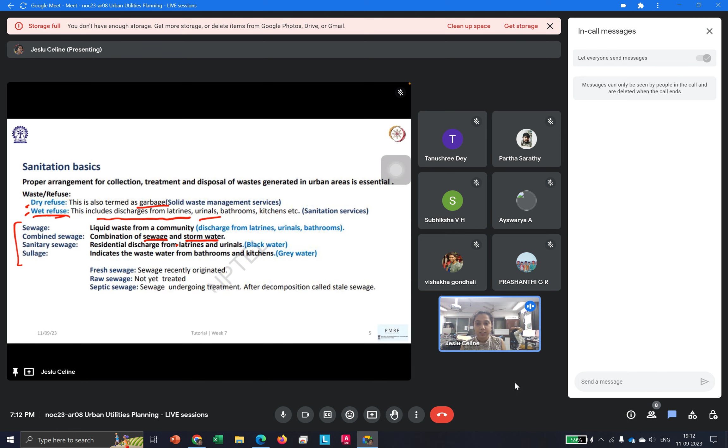Hello, anybody? What is stormwater? Stormwater is from the rainwater discharge runoff. Yes, correct. Stormwater is rainwater discharge or runoff that we carry underground. So you use pipes in order to carry the stormwater. And combined sewage means you'll just have one pipe or one path by which it's carried. So it's a combination of sewage and stormwater going through the pipe; it's called combined sewage.

And then you have sanitary sewage, as rightly said, residential discharge from latrines and urinals. This is also known as black water. So in wastewater treatment,

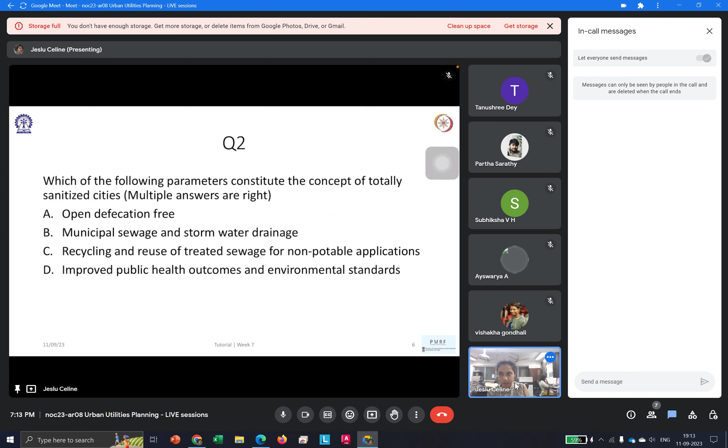we usually separate black water and... sorry, I went to the next question. Let me go back. Yeah. Okay, I think there's some trouble today.

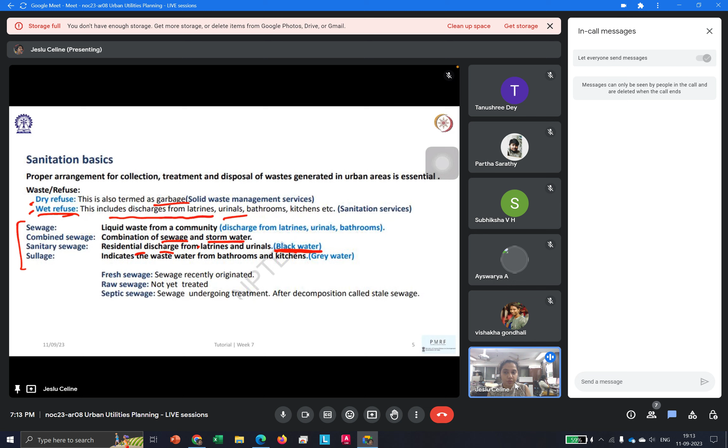Yeah, correct. So we usually separate black water and gray water. The treatment processes used for black water and gray water are different. All this residential discharge from only latrines and urinals is black water, and when you have bathrooms and kitchens, it's gray water, which means the treatment we need to undertake for bathrooms and kitchens is lesser than for latrines and urinals, right? So that's why this is gray water.

Then this is what we discussed. Fresh sewage is that which is recently originated. Then you have raw sewage, which means it's not been treated. And then we had septic sewage, which means something undergoing treatment. And after it has undergone decomposition, it becomes stale sewage. So all these are terms which we normally use. Fine. Any doubts in this question? Shall we go to the next question? Yes, ma'am. Okay, thank you.

So question 2. Which of the following parameters constitute the concept of totally sanitized cities? There can be multiple right answers. Option A, open defecation free. B, municipal sewage and stormwater drainage. C, recycling and reuse of treated sewage for non-potable applications. D, improved public health outcomes and environmental standards. Okay, so let's go option by option.

Is open defecation free part of a totally sanitized city? True. Yes, open defecation free is true. What do we mean by open defecation free again? We learned about ODF protocols, that is open defecation free protocol. So there's ODF, ODF plus, then plus plus. All this mainly talks about keeping our surroundings clean. That is, people should not be seen defecating publicly or outside on the streets.

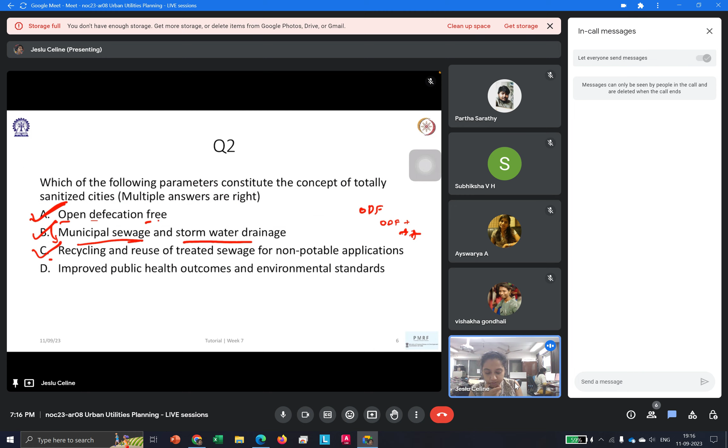Yeah, it's also true, yes. So this is important because this also comes under treated sewage. Totally sanitized cities are kind of ideal, right? So you need to treat your sewage also for this.

How much of this has been put into practice, or which cities fall into totally sanitized cities? That's a next level of evaluation. But conceptually, totally sanitized cities will need to have provision for recycling and reuse of sewage for non-potable applications. By non-potable applications, we mean irrigation, industries, or any other non-potable use. Last class we discussed potable water, wholesome water, and palatable water.

Wholesome water is free from any harmful or disease-causing bacteria, so non-potable water can be wholesome water. If it is palatable, it will have the required odor and taste also, which makes it good for drinking. And potable water is what we usually use for drinking, which is a combination of both wholesome and palatable water. So here by non-potable water we mainly mean wholesome water applications.

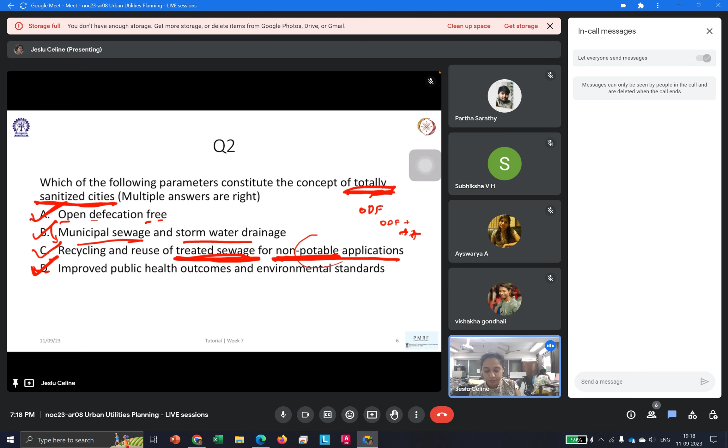And option D, improve public health outcomes and environmental standards. Yes, ma'am, that's also part of it. The importance of improved public health outcomes we have already discussed in the lecture, so I'm not going into details. Totally sanitized cities will have all four components, and many others. So all four options are needed. Okay, very good, let's go.

So this is what we discussed in our lecture. It should be open defecation free, and there should be no manual scavenging. In the first lecture we saw that in early times we had conservancy systems where human excreta used to be carried manually, or stored and then transported to a location. Later we realized the health hazards associated with these, so now we have drainage facilities.

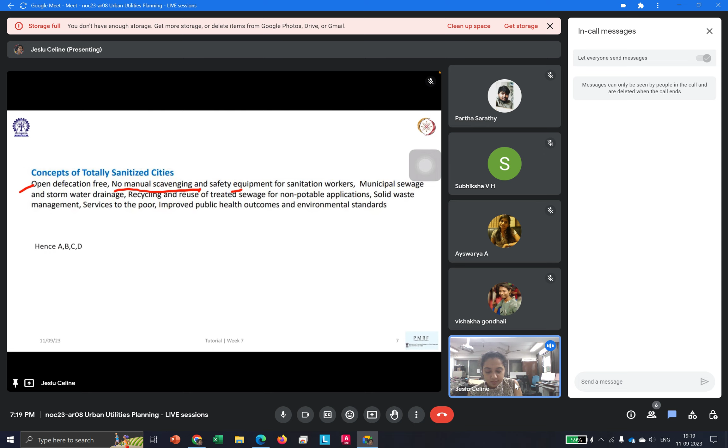So totally sanitized cities will have no manual scavenging. And all sanitation workers will have safety equipment so that they do not catch diseases easily. If they're going into drains or underground channels, they need proper safety equipment to protect them from any hazards inside.

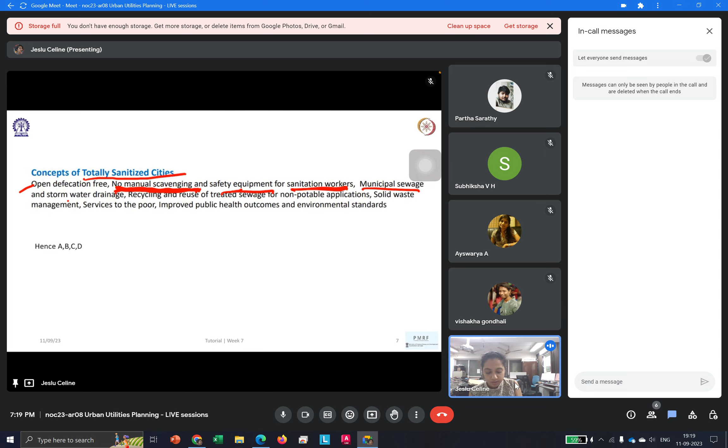Then the other factors: municipal sewage and stormwater drainage was one of the options. Recycling and reuse of treated sewage was in the options. Solid waste management is also part of totally sanitized cities. Services to poor and improved public health outcomes we already saw. So all these should be met, and the answer is all four options are correct. Any doubts? Can we proceed to the next question?

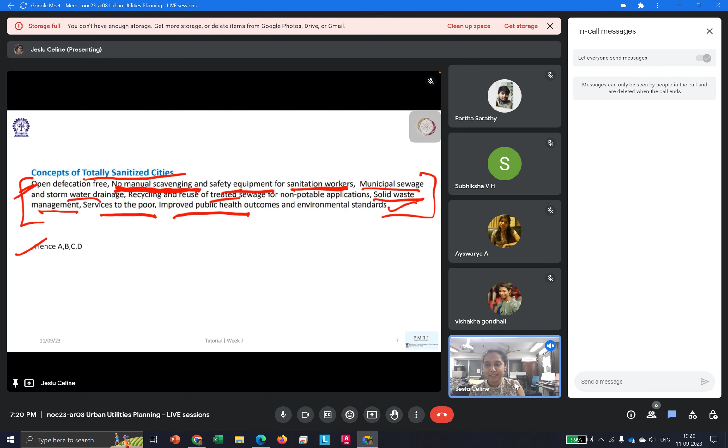Yes, thank you. This interaction helps, so I can be sure we can proceed. Question three, match the following acts with their function. We have four acts and different functions, so let's go act by act. The first one is the Water (Prevention and Control of Pollution) Act of 1974 and its amendments. Which do you think it matches best? Anybody can attempt.

Prevent and control water pollution and ensure the wholesomeness of water, ma'am. Is it right? Okay, so you feel this might be the correct answer, prevent and control water pollution, but you're not sure of the second part, ensure wholesomeness of water. Oh, sorry, I think I just went to the answer. Okay, let it be. Anybody have a difference of opinion, any other option? No.

One easy method for match the following in your test, if you are a bit confused, is to look at the other options. If any other option is a better match, then we need to think more. Here you are partially doubting whether this part is correct, but none of the other options would match this. So it's clearly given: prevention and control of pollution.

The first one talks about quality of water. This one talks about environmental improvement. Then here it talks about taxes. So if you go option by option also, we see that there is nothing which mainly looks at prevention of water pollution. So even if you're not really sure of this, maybe we can say that this is the best option available over here. So we can mark that.

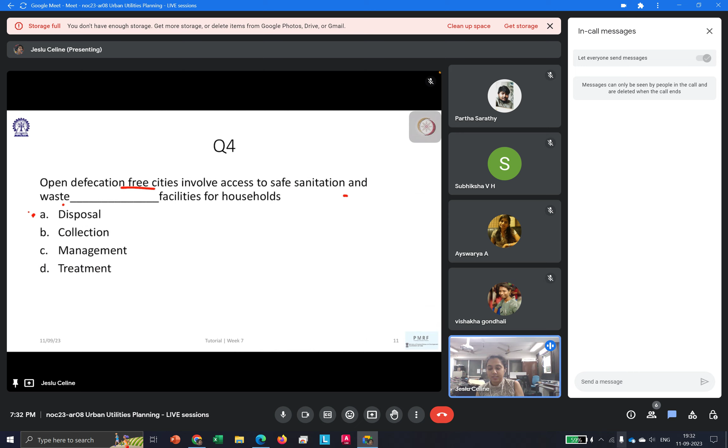Anybody else? Any other opinion on that? Difference of opinion? Or everybody says disposal? Okay, so disposal is the correct answer. Yes, for open defecation free cities, in this particular question, there should be access to safe sanitation and waste disposal facilities for households.

But the logic which Partha said is not the way by which we arrive at this answer. It's not that at the residential level, if we give a disposal facility, everything else will fall in place. It will not, because if you have a facility for disposal, but you do not manage it properly and do not treat it properly, then it creates a problem.

So, for instance, I have seen this in Kolkata. Right outside the airport there's a huge area, I don't know how much, but it's very huge. All the waste which has been collected is dumped over there. It's supposed to be incinerated, so it's dumped there waiting for its turn to be incinerated, but it's not.

So you pass through that locality, you cannot go through that road. It's right outside the airport, so anybody going to the city will have to see that at least once. I've observed this in many other cities also, not just Kolkata. In Tiruchirappalli also, a huge waste pile has been formed because of dumping. So the problem with this is that there is collection.

That's because they have a disposal facility. They are keeping it somewhere, somebody is even collecting it, which means the second step is also done. But maybe on the management side some weaknesses are happening, and on the treatment side definitely a weakness is there, or it's not being planned properly. So just by having this facility in our city, it's not necessary that all the others will fall into place.

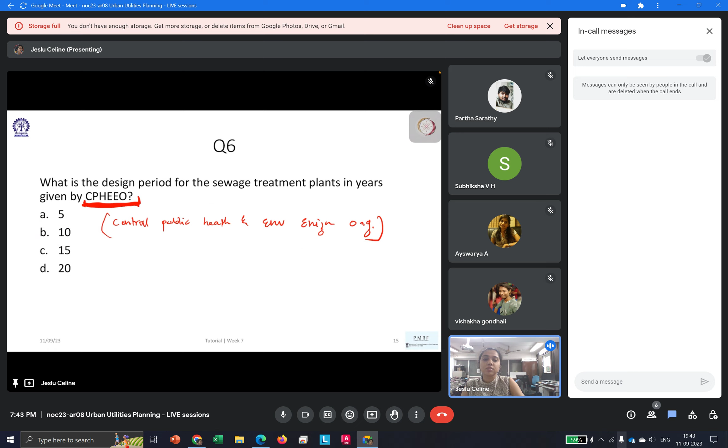So this body is responsible. It's a part of the Ministry of Urban Development. It's a small wing in the Ministry of Urban Development, and it mainly deals with all the matters related to water supply, sanitation, etc. That is why all the manuals that we are seeing regarding water supply and sanitation are CPHEEO manuals. So in our references also, you might have noticed that most of the content we have taken from the CPHEEO manual.

So now we are talking about design period. What is design period again? Let's have a quick recap. What is design period? Like how much period of time it should be worked. Yes, very good. So this we learned in our module 2, I think, where we discussed design period. It's mainly the duration for which the facility should last. At that time, we were mainly talking about water supply facility.

So here again, now we are talking about sewage facility. There we were designing reservoirs or underground tanks, or how do we take water from underground. So all those infrastructure, underground wells, aquifers, how long will they last? Then we were learning about overhead reservoirs, pumping stations, and their design periods. We were thinking, if you're building a facility, how long should that last?

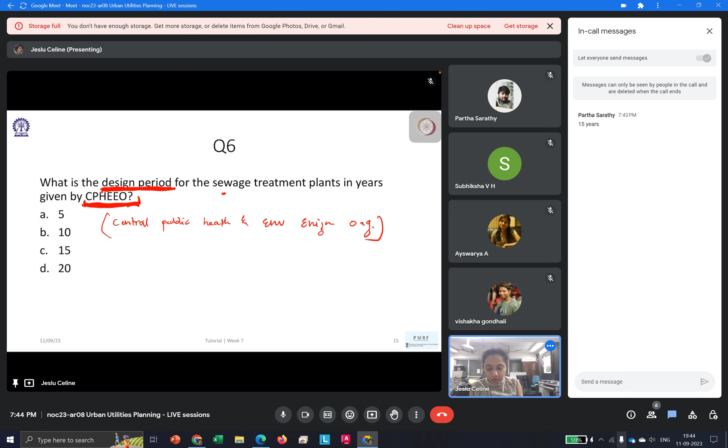So here we are mainly talking about treatment plants, the sewage treatment plant, but in the lecture we discussed other sanitation facilities also, and we saw how long the facility should be designed for. So that is design period.

And in this week 7 lecture, we learned about short term planning, medium term planning, and long term planning. Remember? Short term is approximately around 5 years; the design period is short. Then you have medium, around 15 years. These are very general numbers, just to give you a range of values. So around 5 years is short, 15 years medium, and if it's around 30 to 35 years, then you say it's long term.

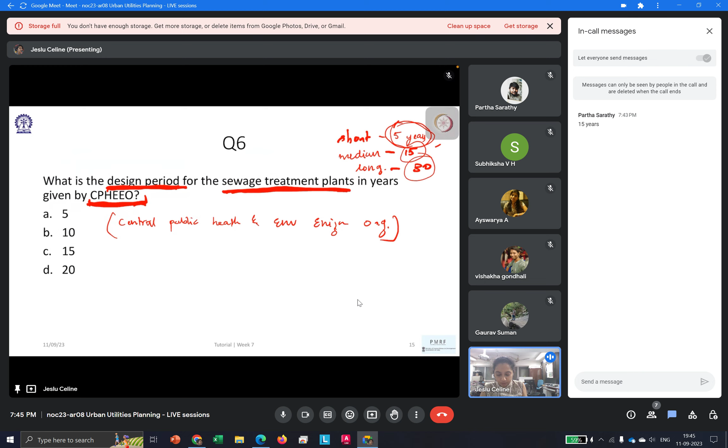So now, coming back to the question, we are talking about sewage treatment plant. Based on this, can you guess what this will be? Do we design treatment plants for short term, medium term, or long term? Medium. Medium term, so let's say 15. Yes, ma'am. Anybody else, any difference of opinion?

Okay, no. So we design it for medium term because a treatment plant is an investment. Towards the end of our lectures, in the last two lectures, we saw different types of treatment plants and the different layers which are involved. So designing it for a short term is not feasible, because if it gets worn out within 5 years you'll have to invest more again. So you need it for some more time.

And designing it for a long term might also not be good, because there are certain elements or components in it which might get worn out in a short or medium term. So you cannot keep the treatment plant; you have to keep replacing it.

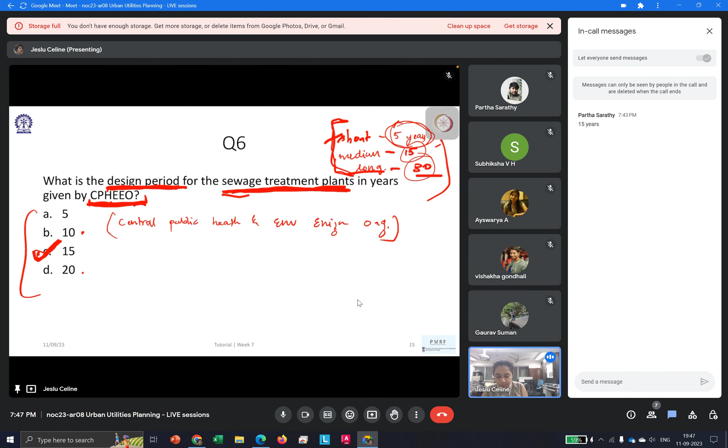So this is not something which is designed for a long term also. So a medium term is good enough. So 15 is the right answer. It could have been anywhere 10 or 20, but as per the CPHEEO manual, 15 years is what we have. So let's see some of the other things.

So we have other elements which are part of the sewage treatment or sewerage components. We have land acquisition. Land is something which needs to be a long-term investment because you cannot keep changing the land. You don't leave one land and go to another land to build another treatment plant. So land acquisition is always done for a long term.

Then sewers are also laid for a long term, but non-conventional sewers are laid for a shorter term because they might have come out of certain emergencies or certain specific requirements. That's why they're non-conventional. So you have them for a medium term. Then pumping mains, which are for long term. Pumping stations also long term.

Machinery can get worn out, so it's for a medium term. Treatment plant is for a medium term. Disposal again for a long term. And utilization can be medium term or case specific; it can vary. So these are the standards, and based on the standards we usually design. Any doubts? No? Okay, let's proceed to the next question.

Question 7. Which of the following statements is or are true concerning the city sanitation plan? Multiple answers are correct. A, it considers only long-term sewage project plans. B, it involves a determination of existing needs, demand or deficit. C, it involves the evaluation and monitoring of 100% sanitation status. D, it involves capacity building. So option A, is it correct? Does the city sanitation plan involve only long-term sewage project plans? No, ma'am. What all does it involve then?

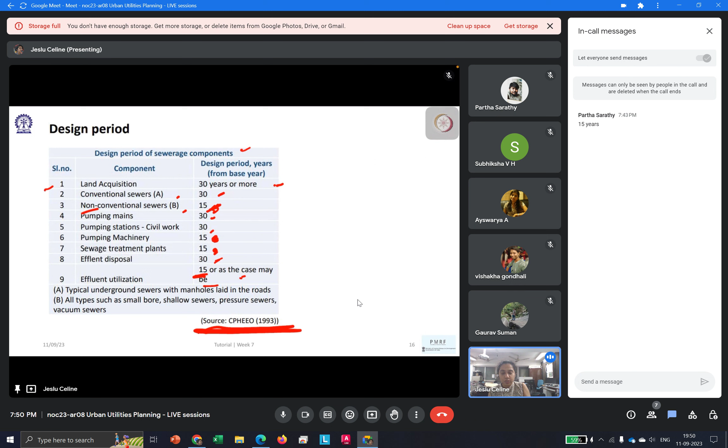So it involves both. Channeling all the network is a long-term plan, so it focuses on that also. But you also have other short-term or medium-term plans which we saw in the previous question, for instance a treatment plant, which is for a medium term, or machinery or laying of sewers. So these components of the sewerage system will also come in your city sanitation plan.

So it considers long term, short term, and medium term. This will be clear in our next slide, where we will see all the components of the city sanitation plan. So when you say only long-term plans, that is a wrong answer. Now, B, it involves a determination of existing needs, demands or deficit. Is it correct?

Yes, ma'am. Yes, it's correct. I think that is what Gaurav was also trying to say. It looks at channelizing things. You are understanding the existing needs, where the demand is, what is deficient, and how you channelize towards it. So yes, it involves that. And option C, it involves the evaluation and monitoring of 100% sanitation status.

Yes, ma'am. So this is planning for it, then you also have evaluation. That is also part of the city sanitation plan. Now, option D, does it involve capacity building? Yes, it does. Capacity building we saw in the previous one, with the different organizations. NGOs are in charge of capacity building and all that.

So this is our city sanitation plan, which we learned, from the Ministry of Urban Development report. It involves all the aspects. You have operation and maintenance. Then you also have implementation and management. It also has capacity building. Then it has the evaluation for 100% sanitation status. Then what was the other one?

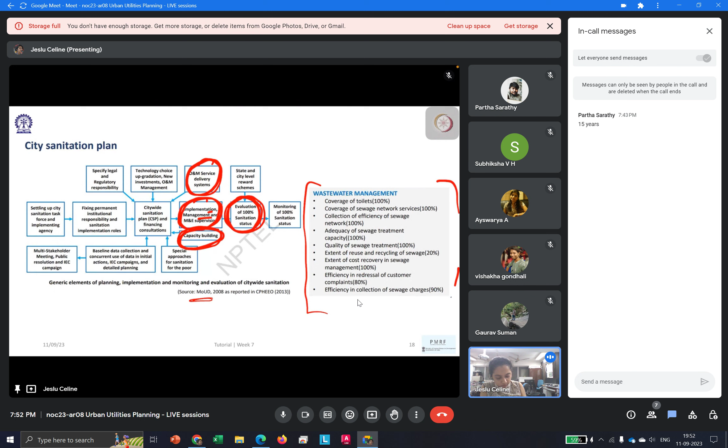Understanding the existing needs, setting up technology, baseline, special approaches, setting up a task force and implementing agency, meeting resolution, O&M. It involves understanding the existing needs, demand and deficit also. So for wastewater management, all these are also given. That is our next question. Let's come to that then. Was there any doubt in the previous question?

Okay. So let's go to the next question. Match the following wastewater management parameters with service level benchmarks. So by service level benchmarks, we are mainly talking about the percentage of facility, so for each parameter, how much percentage of that parameter needs to be there. So it's a benchmark. You say that at least this much percentage should be there. The benchmarks have been set based on that.

So let's go option by option. This is directly from the manual, so there's nothing more to discuss. So we can guess and then go. Coverage of toilets, how much percentage? Any guesses? 100%. Okay, 100. So coverage of toilets 100%. Yes, we just saw it right now.

Then extent of reuse and recycling of sewage, how much percentage? Extent of recycling of sewage, how much percentage? Ma'am, I think 20. Okay, okay. Recycling of sewage is not given much importance. Fine, let's see. Then redressal of customer complaints.

Yeah, so it's 80, ma'am. 80 percentage. Redressal of customer complaints, you say it's 80 percentage. Okay, correct. Then D, efficiency in collection, so 90 percentage. So this is what is there. So let's see. Yeah, we just saw it in the previous slide.

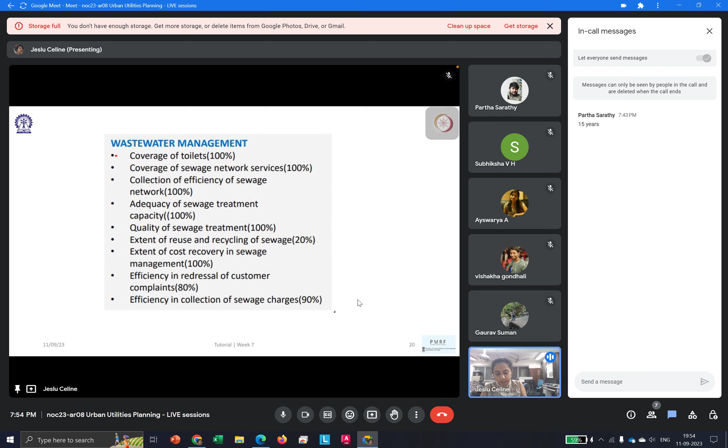So yeah, coverage of toilet 100 percentage. Then what else was there? Efficiency in redressal of customer complaint 80 percentage, efficiency in collection of sewage 90 percentage. Extent of reuse and recycling of sewage 20 percentage.

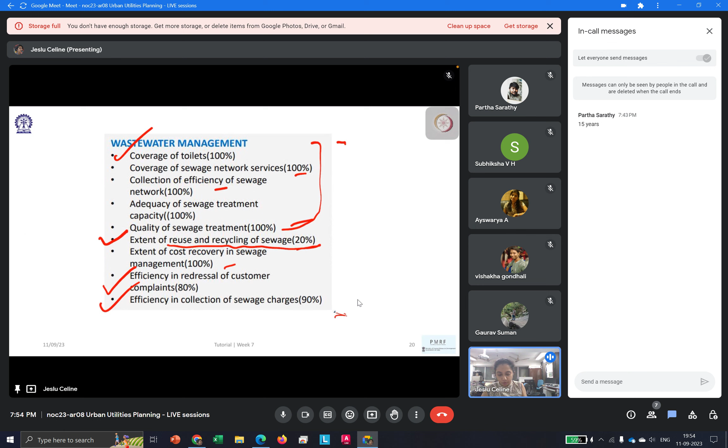So you need not memorize the whole thing, but I would say for examination point of view, some important things, especially the 100 percentage ones. There are so many 100 percentage that you can remember a bit because it might be important from your examination point of view also. So this one works out to option D. So we just discussed this. So let's go to question 9.

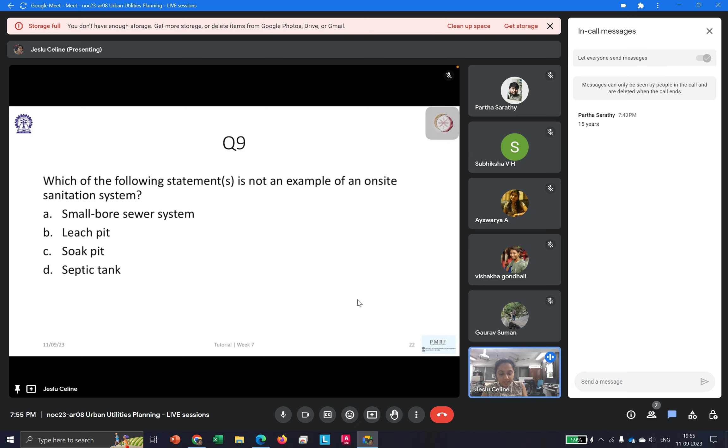Which of the following statement is not an example of an on-site sanitation system? Firstly, what are the different sanitation systems and what is an on-site sanitation system? So we learned 3 types of sanitation systems. Can somebody give a quick recap of 3 types of sanitation systems? Anybody? Partha, I think you can do that. Ma'am, leach pit, septic tank, and C and D, I guess.

Yeah, so these are all examples of sanitation systems like leach pit, soak pit, septic tank. I'm saying broadly, so here they've asked for an on-site. So I can say that one type of sanitation system is the on-site sanitation system. Apart from that, 2 other sanitation types we learned. Anybody ringing any bells? Decentralized. Very good. Yes, so you have got decentralized, and then of course, if it's decentralized, then what's the other one?

Conservancy. Conservancy, yes, we learned that also. Then you have the centralized system also. So we can say centralized system, decentralized system, and on-site system. These are the 3 which are normally in practice right now. If you look at any city, mainly these will be there. And decentralized itself can be a combination of centralized and on-site. So it means there's a decentralization which is there.

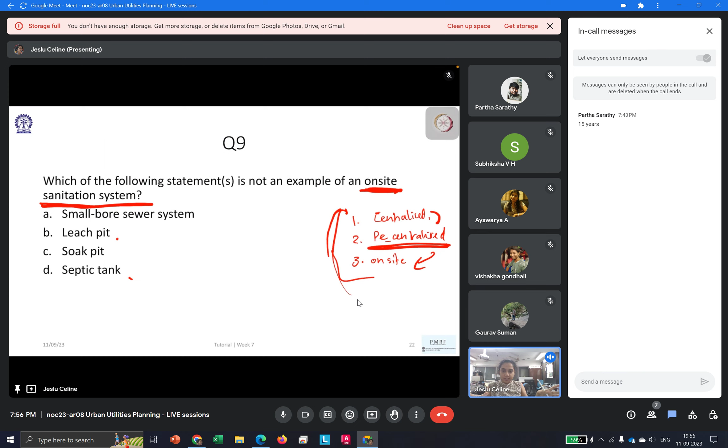Like if you have a city, then over here there is one STP or sewage treatment plant which caters to this region, then there can be a central system which caters to all the regions. And then some regions can have on-site sanitation systems also. So these are the three which we learned. So again, by definition, centralized means there's a central facility and you're carrying all the sewage to that central facility and the treatment is happening at the central facility.

Decentralized is what we discussed right now. There can be small clusters, and it can be along with a centralized facility and an on-site facility also. A mixed facility can also be called a decentralized facility. Then you have on-site, which means you're not transporting it anywhere, but on the site itself you're treating it, removing the effluent out, and then taking the sludge out. So there's some on-site treatment facility.

So we have been given four options and asked which of the following is not an on-site sanitation system. So let's see. A, small bore sewer system. Is it an on-site sanitation system?

Any guesses? You can just guess. Yes, no? Nobody, no opinion? Okay, let's start from the last option. Septic tank. Is it an on-site sanitation system? Septic tank, yes, we should be knowing septic tank because in most of our houses there's a septic tank, right? In our residences, I think yes.

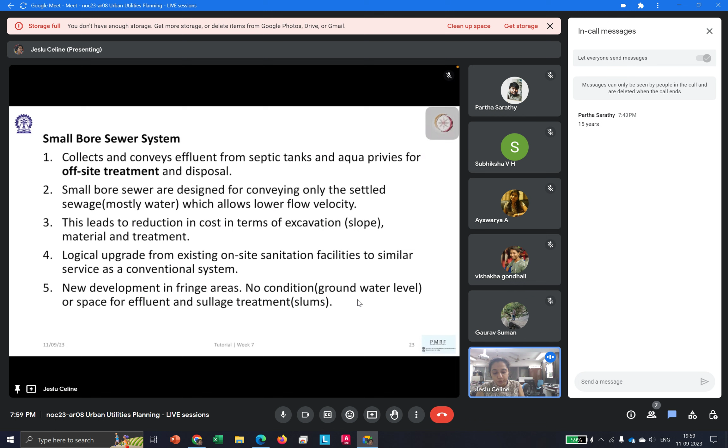Small bore system is not an on-site sanitation system. In a small bore system you collect it and then you transport it to a different location and the treatment happens there. So a small bore system collects and conveys the effluent from septic tanks and aqua privies for off-site treatment and disposal. So it's a combination. You have a septic tank which is on-site, but from this the small bore system collects it and conveys it to an off-site treatment where it is disposed of. This can also be there in most residences.

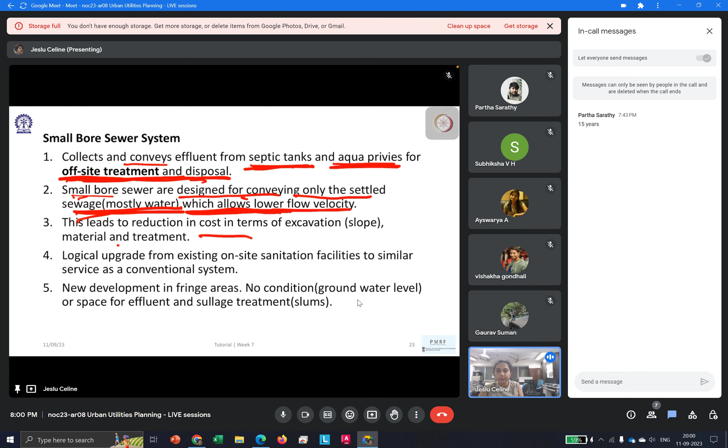It's designed for conveying only the settled sewage, which allows a lower flow velocity. You mainly take the settled sewage, which is mostly water, and transport it out. Its advantage is that it can reduce the cost in terms of excavation, slope, material, treatment. Your septic tank need not be of that much depth; its capacity can be reduced because some amount of sewage is collected and taken out for off-site treatment. So you save in cost. It's a logical upgrade from the existing on-site sanitation system.

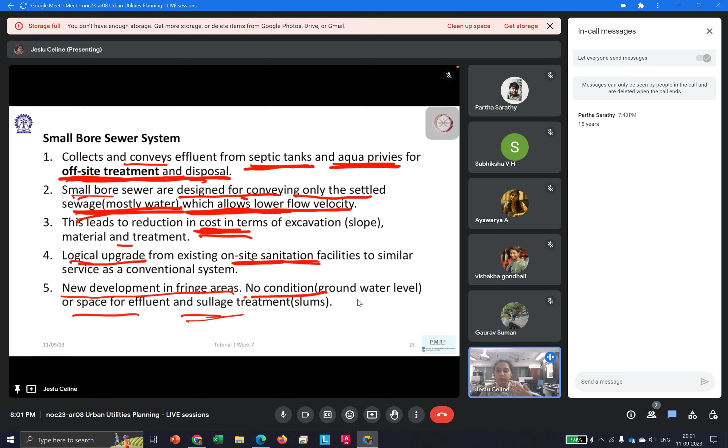One more additional benefit is that it can allow new development in fringe areas, so you're not restricting future development, or your space for sullage treatment. All this is not getting affected. So these are the advantages of small bore system.

One sec, somebody wants to join.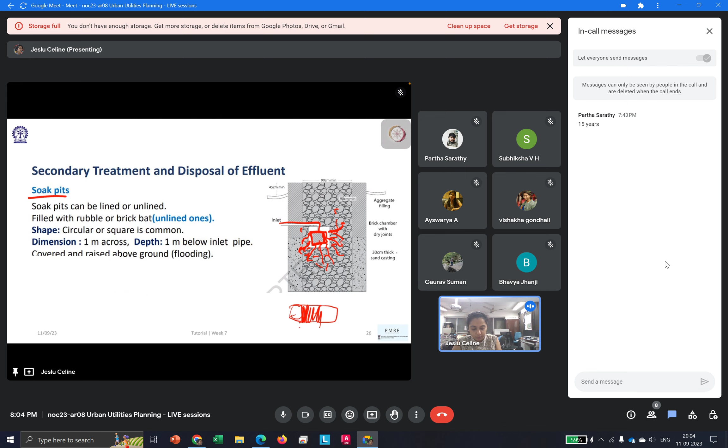So sometimes it can be made with a brick chamber. So we learned it can be a honeycomb brick, which means you have bricks like this and this part is hollow, which allows the water or the effluent to completely go outside. So yeah, so that's a soak pit. So yeah, so that's it.

So we've discussed all the options. So all these are on-site treatment facilities. So let's go back. Let's see: the leach pit, soak pit, septic tank, all we discussed. So yeah, small bore sewer is the answer for this. It's not an example of an on-site sanitation system. Any doubts in this question? No? Okay, let's proceed on to the next question.

So yeah, so question 10. The optimal pit emptying frequency of a leach pit is? Yes. All should be able to answer this now. Option A, ma'am. Option A, 1.5 to 3 years. So this is what we just discussed. Why? Because effective pathogen destruction happens in about 1.5 years.

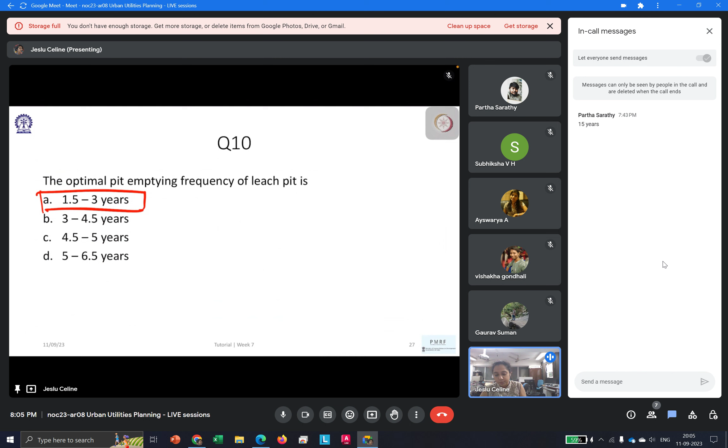So within 1.5, and then one more 1.5, maximum after 3 years; beyond 3 years, if you don't empty the pit, then it will become a problem. So the optimal pit emptying frequency is always 1.5 to 3 years. Okay, let's proceed on. So yeah, we just discussed this. Yes, question 11.

Infiltration area required for infiltration of waste liquid in the leach pit is given by which of the following? Yeah, so this, I think some recollection. So option A, total flow in pit every hour divided by infiltration rate. Option B, total flow in pit every day divided by infiltration rate. Option C, total flow in pit every hour divided by sludge accumulation rate. D, total flow in pit every hour divided by sludge accumulation rate.

So we need to know what comes in the denominator and what comes in the numerator. In the denominator, is it infiltration rate? By sludge, what we are talking about is the concentrated waste elements, and infiltration is the effluent or the water which is there along with it. It infiltrates outside. So infiltration area, Option B, ma'am. Option B, total flow in pit every day divided by infiltration rate. Anybody else, any difference of opinion or any other answer?

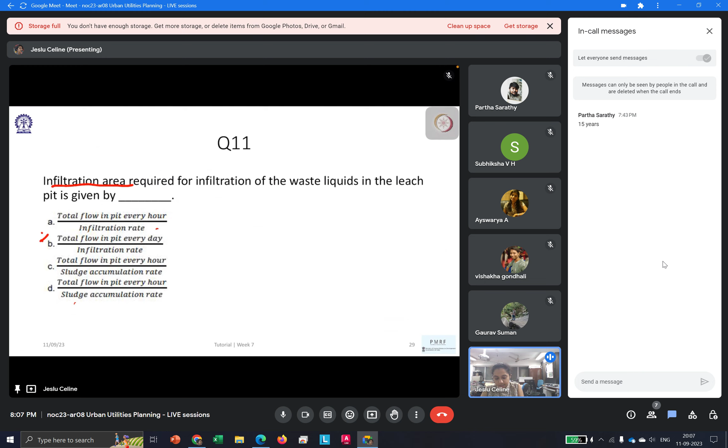Okay, so this is the correct answer: total flow in pit every day divided by infiltration rate. So again, why is it there? Because for the infiltration area required, if you take it for every hour, we will not get the correct estimates, because throughout the day the total infiltration gets accumulated, right? So if you're just taking it for one particular hour, it would be very less. So we need to take it for every day and divide by the total infiltration rate.

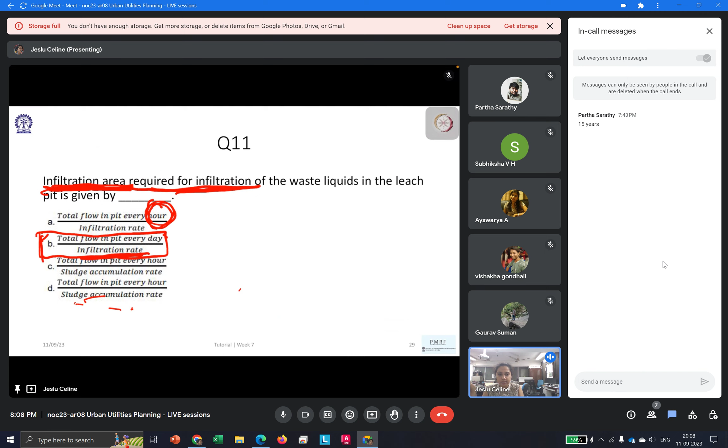We don't take the sludge because it's the infiltration area. So based on the total infiltration rate, if the infiltration rate is less, you need to increase the infiltration area so that it infiltrates outside and you have the concentrated sludge inside, so that the leach pit is more effective. So it's option B, total flow in the pit every day divided by infiltration rate. Any doubts in this question? Okay, let's proceed on to the next question.

Question 12. What is the minimum number of dispersion trenches to be provided if the area required for the dispersion trench is 90 meters square? Consider the width of the dispersion trench is 1 meter. So this is a dispersion trench. You have 1 meter width and area. So what is the minimum number of dispersion trenches? How many dispersion trenches can we make with the area provided? So width is 1 meter and 90 meters square is the overall area of the dispersion trench. So how many can we do? How do we go about this question?

So we learned in the standard the minimum length. Do you remember what is the minimum length of a dispersion trench? It's 2 meters. 2 meters. Yes, very good. So the dispersion trench minimum length has to be around 2 meters. And what is the maximum length? Maximum length was 30 meters. 15, ma'am. No, 30 meters. Maximum length of the dispersion trench is 30 meters. That was a good guess, but it's double. So a dispersion trench lies between minimum 2 meters and maximum 30 meters.

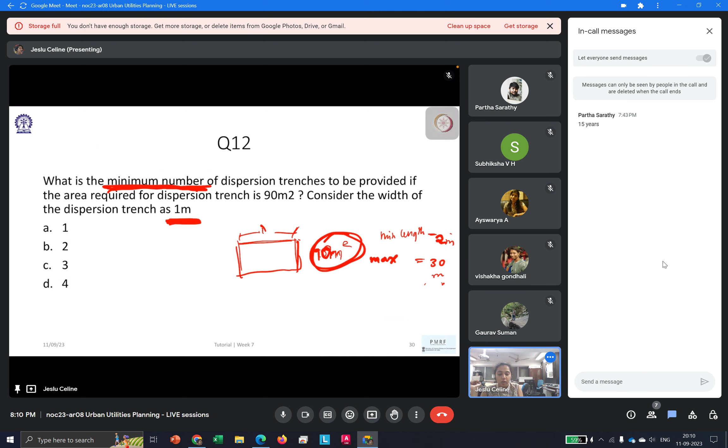So here the question asks, what is the minimum number of dispersion trenches which can be provided? You know the total area, and width is given. This is kind of given to mislead you, because to give the volume, this is given. But here we are mainly talking about the length and the area which is given. So if you want to find the minimum number of dispersion trenches, would you divide 90 by 2 or 90 by 30? 90 by 30. Very good. So why?

Since the minimum number is asked, you're taking the maximum length, and you're saying the minimum number of dispersion trenches that can be provided is 90 by 30. But if the question was the maximum number of dispersion trenches, we would divide by 2, because then you're taking the minimum length so that you can maximize the dispersion trenches. So the answer is 90 by 30, which works out to option C, 3. Any doubts in this question? Okay, let's proceed on to the next question.

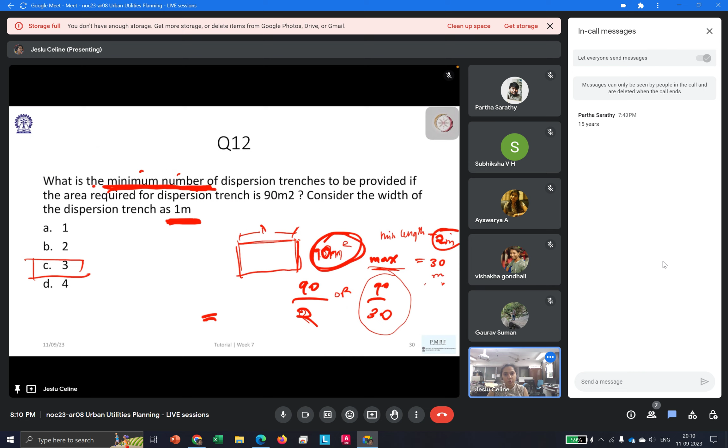Blank filter is a fixed bed biological reactor. Upflow aerobic filter, upflow anaerobic filter, trickling filter, gravity filter. Any guesses? Okay, so firstly, what is a fixed bed biological reactor? Upflow aerobic is what you're saying. Okay, let's see that. But before that, tell me, what is a fixed bed biological reactor? In presence of microorganisms, wastewater will be treated. It will be a reactor kind of work.

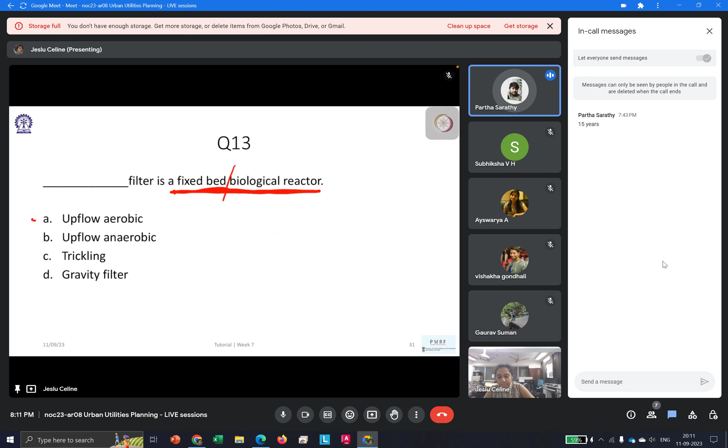Yeah, you can split that into two. There's a fixed bed here, then there's a biological reactor here. What you explained was a biological reactor: using microorganisms in some biological reaction, you are treating wastewater. So that is correct. But what do you mean by a fixed bed? Why is it important to have a fixed bed in this question? Ma'am, no, it's not upflow aerobic. It will be moving in upflow aerobic. Sorry. Okay, so what will it be then?

I think anaerobic, because it will not have oxygen, and in a stationary thing it will be happening. Correct. Yeah. So the answer is upflow anaerobic filter. So you're right. Your logic is also absolutely right. So let's discuss that a bit.

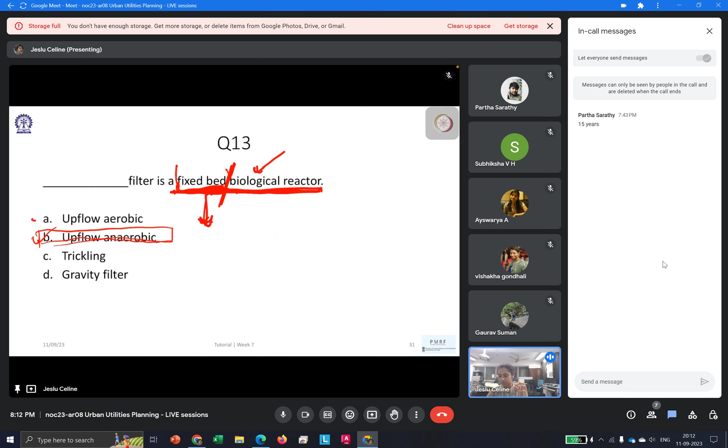So by fixed bed, you mean that it's fixed, and in the biological reactor, you're planning that the biological reaction is going to happen in this particular region. Leave alone the moving parts. Yes, nothing is moving. Apart from that, sometimes it can be combined. So the aerobic biological reaction can happen in this region, this region, this region. So it can happen anywhere. Even if that is the case, then it's not a fixed bed.

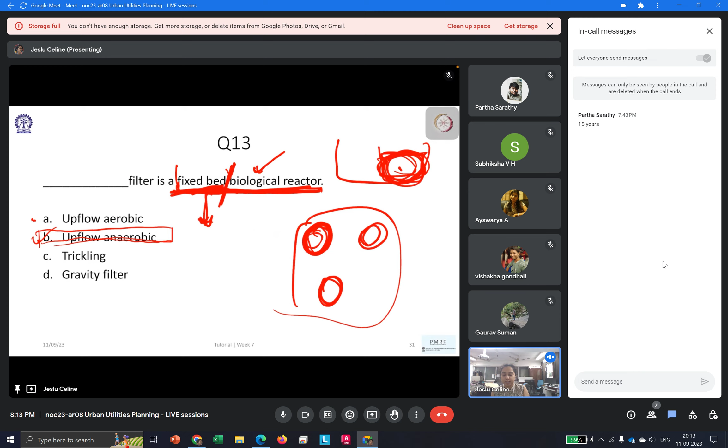In a fixed bed biological reactor, you know that there's a particular chamber, or that this particular region is designated for the biological reaction to happen. So that's why it's called a fixed bed biological reactor. So now you have upflow aerobic reaction, upflow anaerobic, trickling, and gravity filter. So let's see everything. So upflow anaerobic reactor, which is your option B. In upflow aerobic, as rightly explained, you have some movement, so it's ruled out.

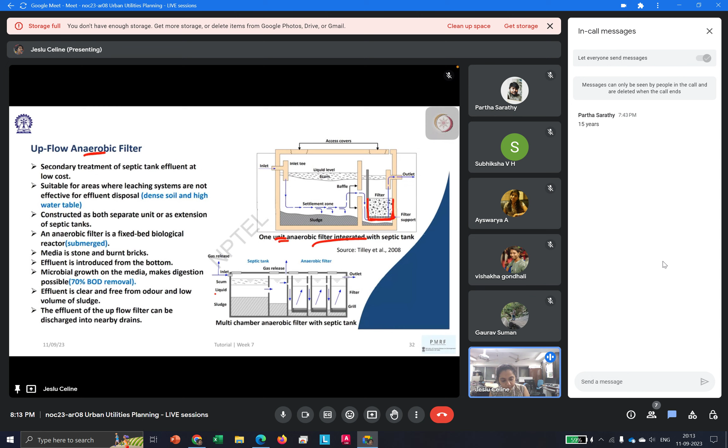Now in upflow anaerobic, you have this region. So this is an example of upflow anaerobic filter, which is integrated with septic tank, and then you have a multi-chamber. So in both we will see. In this one, you have a region which is fixed, where the biological reaction is happening. Here also you have a fixed bed where it settles down, the biological reaction is there, and the BOD removal happens in a fixed region, and you have certain other regions for the gases to emit. So because of this, the upflow anaerobic filter is an example of a fixed bed biological reactor.

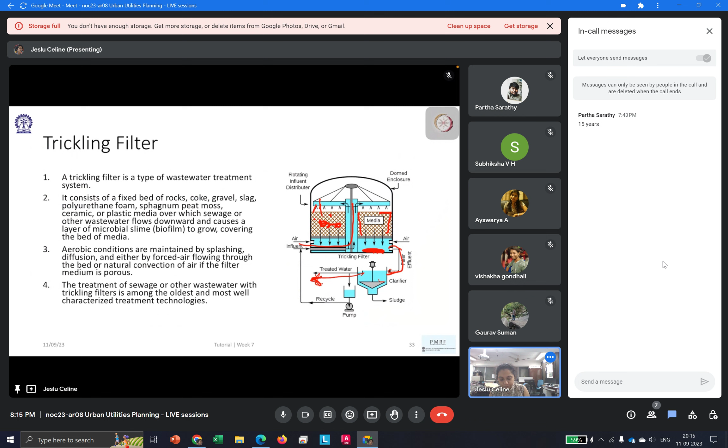Yeah, so your gravity filter also works on the same principle. This we have learned. You have multiple layers, and because of gravity it passes through. Last time, for water supply mainly, we learned about rapid gravity filter, slow gravity filter. So in sewage treatment also, there are multiple layers by which the effluent passes, and in a gravity filter also, at certain levels the sludge is removed, so you're not having a fixed bed biological reactor. That is present only in an upflow anaerobic filter. Any doubts in this question? No, ma'am. Okay, let's proceed on to the next question.

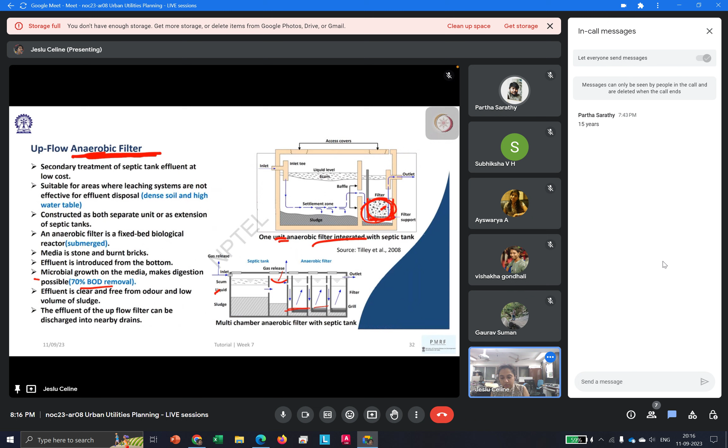Question 14. Match the following sewage management systems with its functioning mechanism. So we have a package septic tank with contact aeration type system. These are a bit technical details, which in the lecture have been explained very beautifully, so there's nothing more to explain. So let's do this quickly. Package septic tank with contact aeration type system, which functioning matches it the best?

Two, aerobic digestion chamber. Third. Yeah, third one. Somebody says third. Uses a fixed film plastic media with high specific area along with continuous diffusion of controlled air. Yes, so that is the package septic tank aeration. Correct answer. We have discussed this in our lecture. Now aqua privy, what is its functioning?

Two aerobic digestion chambers and a filter chamber are involved in treatment. Is that correct? In aqua privy? Yes, no? Nobody. Okay. Then what? An anaerobic filter is employed and microbial growth on the media makes digestion possible. Aqua privy? Is that one?

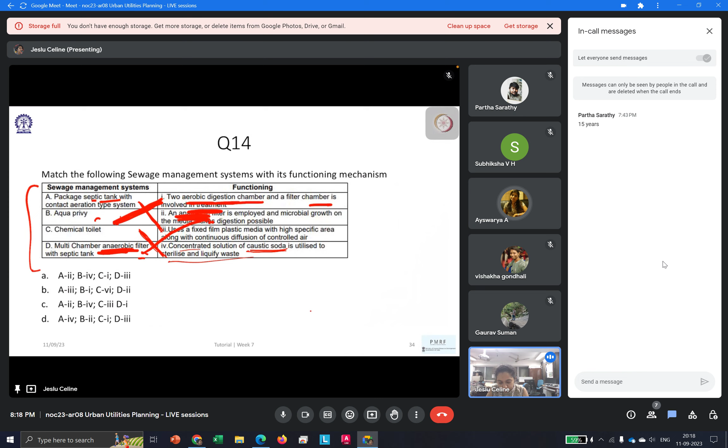So what does it work out to? Which option is that? Option B. Option D, right? Oh, B, sorry. Option B. A is 3. Correct. Yeah, option B. Yes, very good. Any doubts in this question? Shall we proceed further? Yes, ma'am.

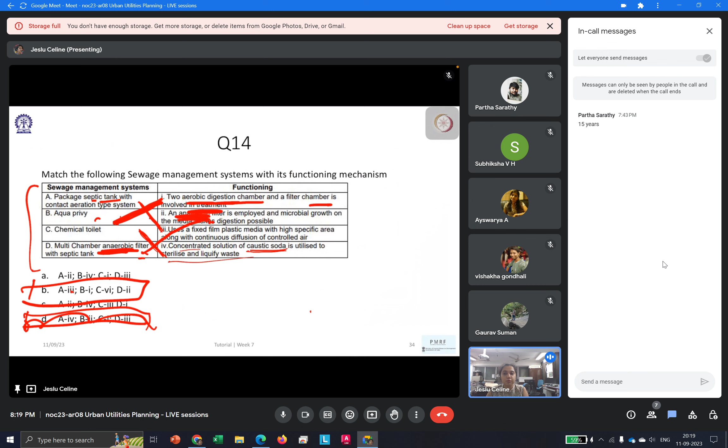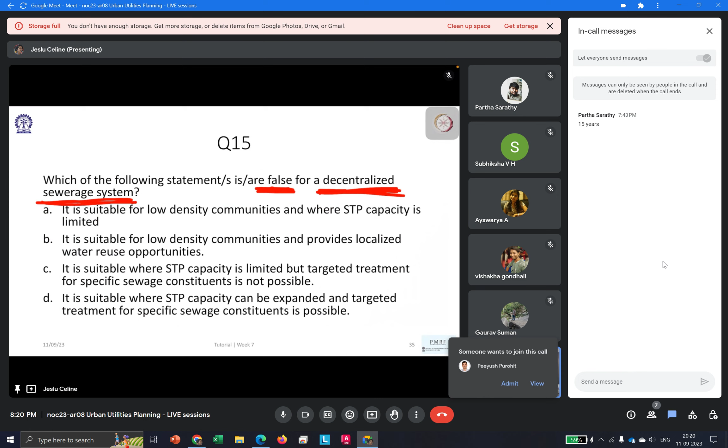So we have been asked to find what is false regarding a decentralized sewage system. Again, we have centralized, decentralized and on-site. Here we are focusing on decentralized. So option A, is it true? Yes. It is suitable for low density communities and where STP capacity is limited. That's the whole purpose, like we discussed. Decentralized, you will have small capacity, and also where an on-site facility is not there. So option A is correct, which means it is not the answer, because you've been asked to mark what is false.

Option B, it is suitable for low density communities and provides localized water reuse opportunities. True, false? I think it's true. False. It's true. Okay, difference of opinion. Somebody said it's true, somebody said it's false. Why is it false? What is wrong in the statement? Ma'am, I think water reuse opportunity is not done in decentralized, I guess. I'm not sure about it.

Okay. So firstly, it is decentralized, agreed. But what is it essentially doing? It's a decentralized sewage treatment plant. And what does a treatment plant do? It takes out the effluent, you have a treatment facility, and after treating it, you're reusing the water. You're removing the sludge and the effluent, by effluent I mean the liquid waste. The effluent undergoes treatment, and that treated water can be reused. That is the whole concept of a sewage treatment plant.

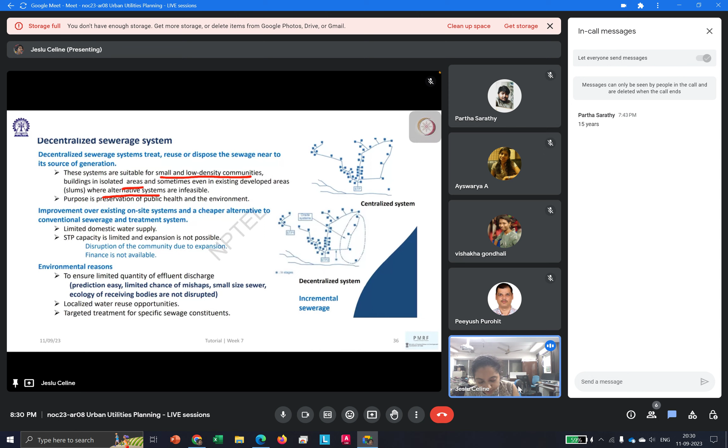So, decentralized systems. These are suitable for small and low density communities, for isolated areas, and where alternative systems are not feasible. And this is a centralized system. So this is what I was explaining, which means there's only one STP. But a decentralized system can have STP1, STP2. It can also have on-site systems.

And on top of it, you want to have a centralized one. So this is more or less like a centralized system because it's covering a large region. But for this entire region, this becomes a decentralized system. If you look at only this region, you can say that yes, it's a centralized system, but this is a decentralized system. And then you also have some on-site systems. So it allows localized water reuse opportunities, targeted treatment of specific components.

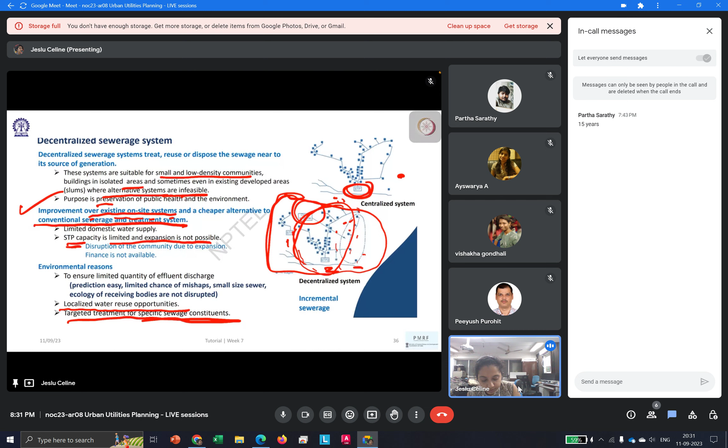That's also there. Now, for a conventional sewage system, the STP capacity is limited and expansion is not possible. So this creates a problem. That is why this is an improvement over existing on-site sewage systems, and it's a cheaper alternative. So when we see this slide, we might misunderstand it by thinking that a decentralized system has limited STP capacity. No, it means that the conventional sewage system has limited STP capacity, and expansion is not possible. Okay.